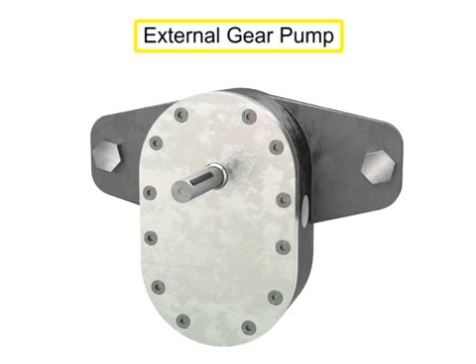Many different types of pumps exist to assist fluid movement in a variety of systems. An external gear pump uses two gears rotating against each other to provide fluid movement.

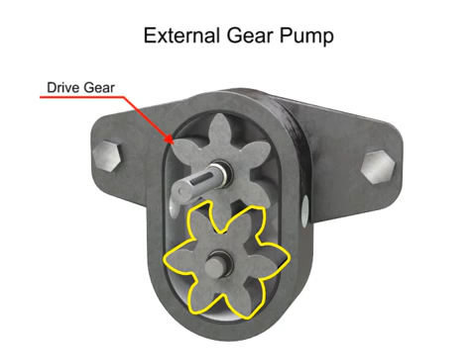One gear is driven by a motor connected to a shaft. This is called the drive gear because it is driven by a motor, and it in turn meshes with and drives the movement of the second gear.

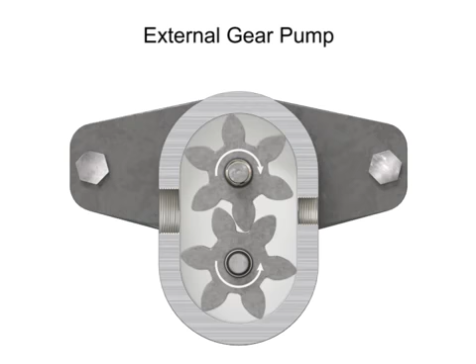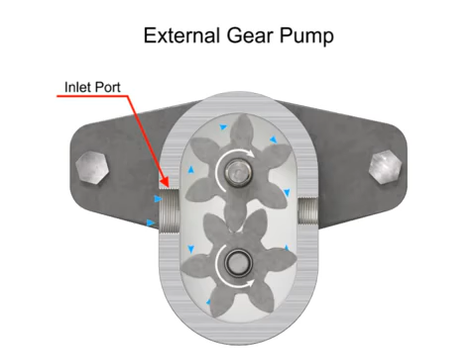As the gears rotate away from each other and come out of mesh, they create an expanding volume on the inlet side of the pump. This creates a vacuum at the inlet port, allowing fluid to flow into the pump. Then fluid flows into the cavities and is trapped by the gear teeth.

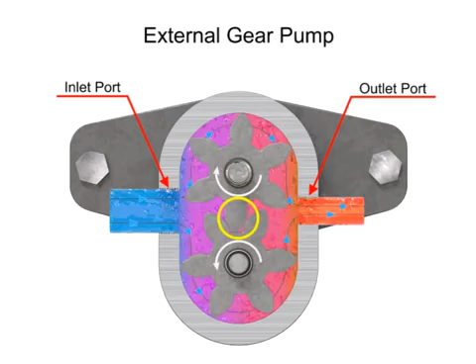As the gears rotate, a flow path is created around the outside of each one. Fluid trapped in the slots between teeth is carried around and discharged into the cavity with the outlet port. Meshing of the teeth in the center of the pump seals the outlet port from the inlet port. No fluid passes between the gears.

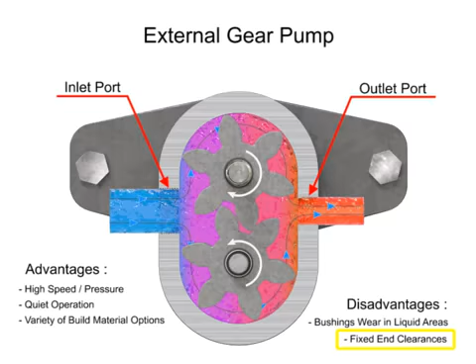The advantages of external gear pumps are their high speed and pressure, relatively quiet operation, and that their design accommodates a wide variety of materials. Disadvantages include bushings in the liquid area can become worn and that they have fixed end clearances.

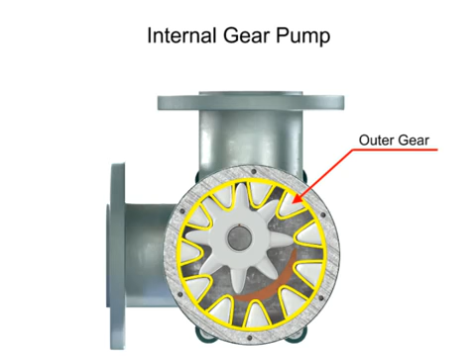Internal gear pumps are exceptionally versatile. This type of pump has one inner gear which is inside a second outer gear. The inner gear has a shaft driven by a motor and has teeth that protrude outward. The outer gear has teeth that protrude inward toward the center of the pump.

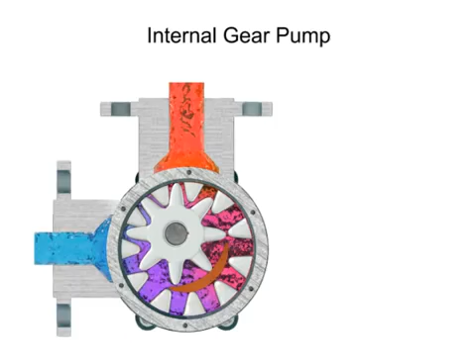As the inner gear rotates, it meshes with and moves the outer gear. Liquid is trapped in the gear spaces and carried from the inlet to the discharge. A stationary crescent-shaped divider separates the intake and discharge portions of the fluid.

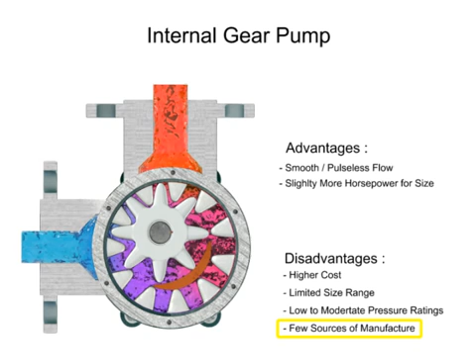Advantages of internal gear pumps are a smooth and almost pulseless flow, and slightly more horsepower for its size. Disadvantages are its higher cost, limited size range, low to moderate pressure ratings, and few sources of manufacture.

A rotary vane pump is a positive displacement pump that consists of vanes mounted to a rotor. The vanes are on an off-center drive shaft. As the shaft rotates, the variable length vanes slide in and out to maintain contact with the pump housing. The tension in the vanes is maintained by either springs or hydraulic pressure.

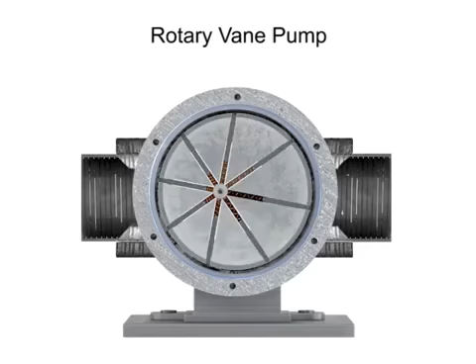As the vanes rotate, they create chambers of varying sizes within the pump. Fluid enters at the largest chamber. As the vanes rotate and retract, the chambers get smaller, forcing fluid to exit through the discharge port.

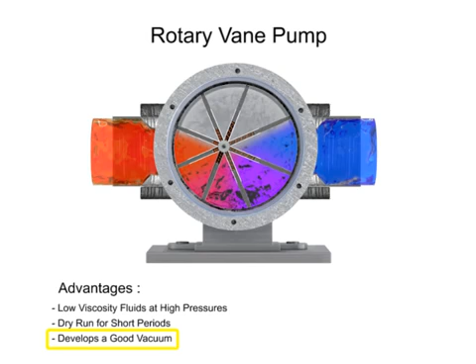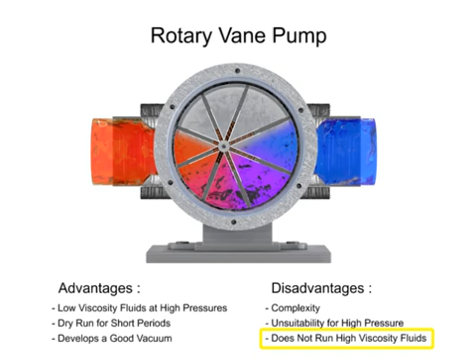The advantages of vane pumps are that they can handle low viscosity fluids at relatively higher pressures, can dry run for short periods, and develop a good vacuum. Their disadvantages include complexity and their unsuitability for both high pressure and high viscosity fluids.

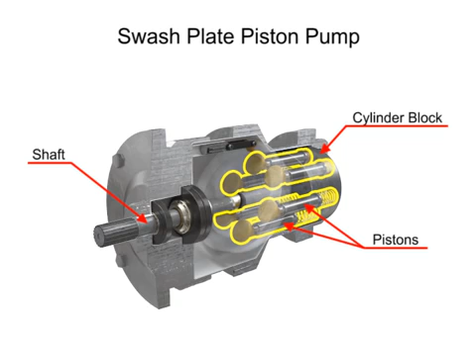Piston pumps come in many different forms. A swash plate is a device used to translate the motion of a rotating shaft into the reciprocating motion of a piston. Swash plate piston pumps have a rotating shaft connected to a cylinder block containing pistons, which are pressed against a stationary swash plate that sits at an angle to the cylinder.

As the shaft rotates, the pistons move against the swash plate, causing them to reciprocate within the piston block. The pistons create a vacuum that forces fluid in during half a revolution and expels fluid during the other half.

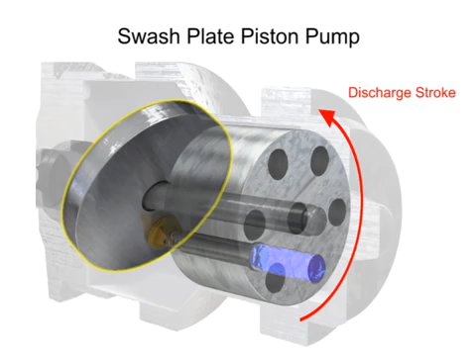On the intake stroke, a spring ensures the pistons pull back and maintain contact with the swash plate, causing fluid to fill the empty cavity left behind. On the discharge stroke, the angle of the swash plate forces the pistons back inside the piston block and discharges the fluid. The greater the slant on the swash plate, the further the pump pistons move and the more fluid they transfer.

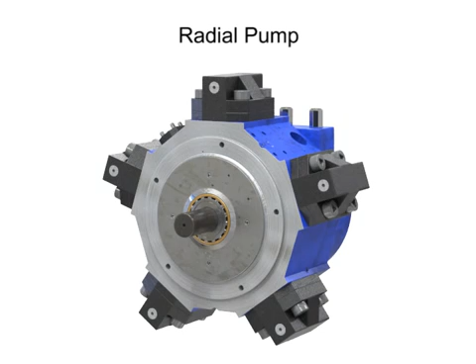Piston pumps, in general, are manufactured with closer internal fits than other pumps. This means that internal slippage can be less, so that they operate with reasonable efficiency at pressures both too high or too low for the operation of other pumps.

Radial pumps are designed so the pistons stroke in a direction at right angles to the shaft. The pistons are arranged like wheel spokes around a cylinder block with an eccentric central cam mounted on a drive shaft.

As the shaft rotates, the cam moves towards the pistons, forcing them down into the cylinder block and discharging the fluid. As the cam moves away, springs help retract the piston and cause the intake stroke. Check valves ensure that fluid only enters the inlet ports and only exits the outlet ports.

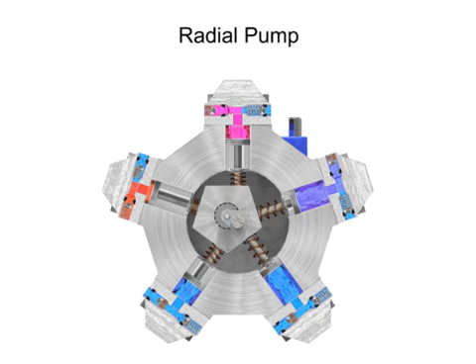Radial piston pumps have a low noise level, very high loads at low speeds, and high efficiency.

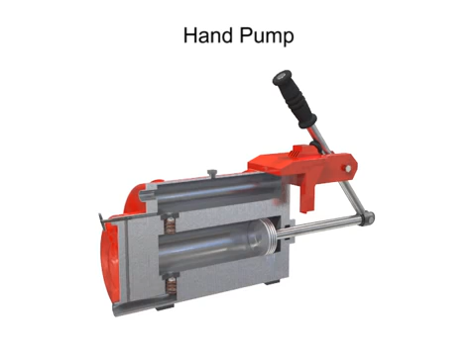Hand pumps are used when a source of power is not available or where the extra expense of a power pump isn't warranted. For example, they are used on shop presses and other portable equipment, serve as standby pumps, and serve as sources of emergency power.

Hand pumps are always of piston type and are usually constructed with a piston working between two check valves.

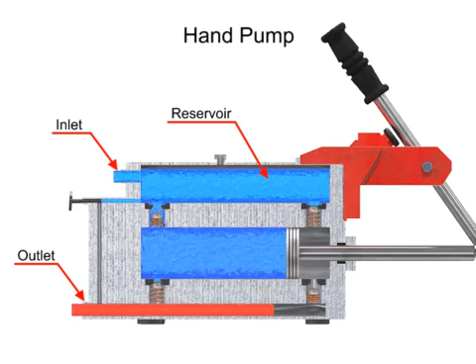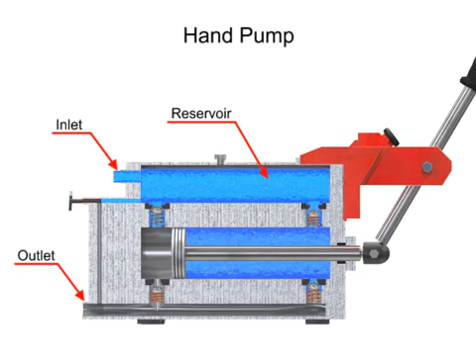Double-acting hand pumps are more efficient, allowing fluid to both enter and discharge on both strokes of the piston. Moving the pump handle in either direction allows fluid to be drawn in from the reservoir and discharged via the outlet ports. Check valves in all locations prevent fluid backflow.